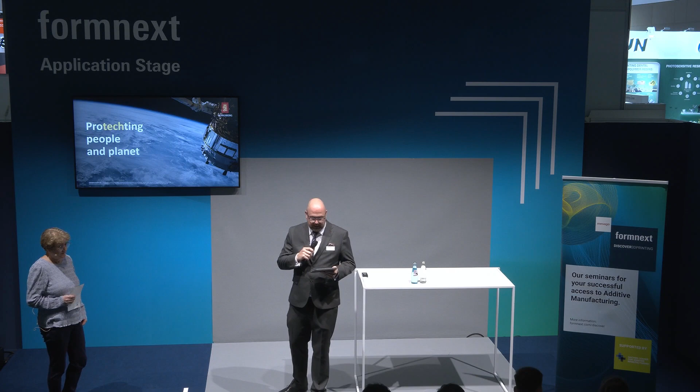Thank you. Hello, can you hear me? Yes.

I work in Kongsberg Maritime, a company that supplies technology, equipment and services for offshore and maritime customers.

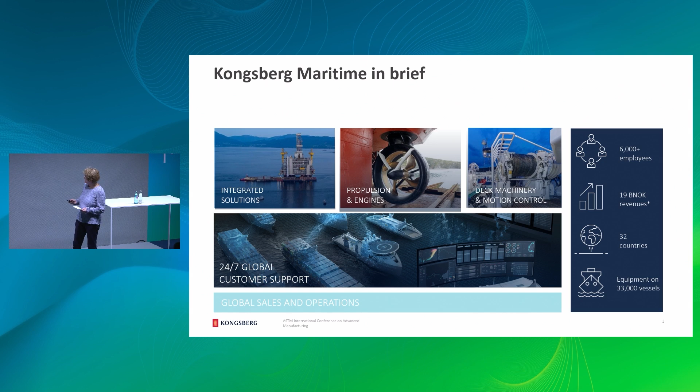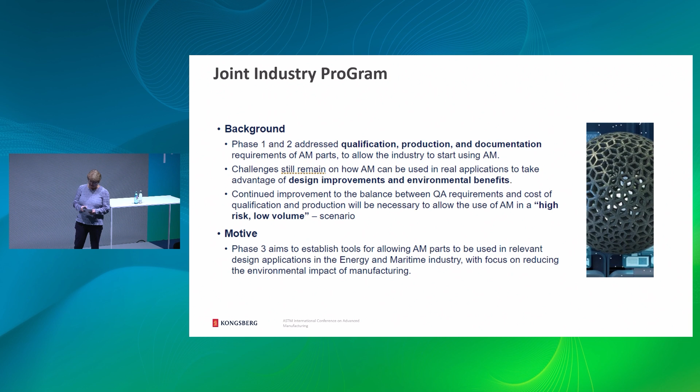We have been part of a joint industry program together with many companies, and we made guidelines for qualification, production and documentation of AM parts. In the next phase, phase 3, we are now focusing on design, sustainability calculation, and product families.

In the first JIP project, we cooperated with SLM and Voestalpine to make propeller blades for a rim drive tunnel thruster. We wanted to print this part to reduce weight, improve maneuvering response because of the reduced weight, and reduce manufacturing, machining and delivery time for this part.

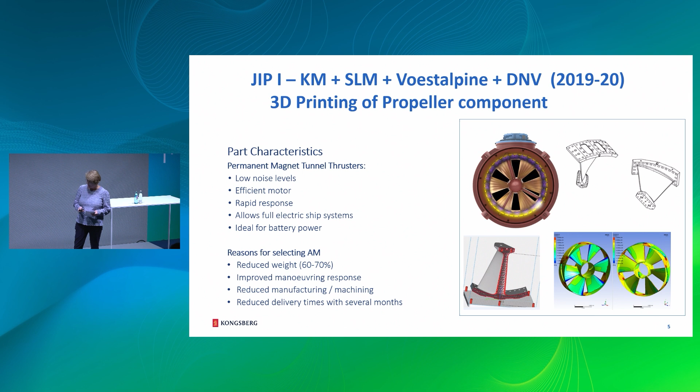Since we were part of this joint industry project, we wanted to produce this according to the new guidelines from DNV. In addition to printing the propeller blade, we made 2. We also printed a lot of test specimens so that we could test the part according to AMC3, the most critical test regime in the DNV guidelines.

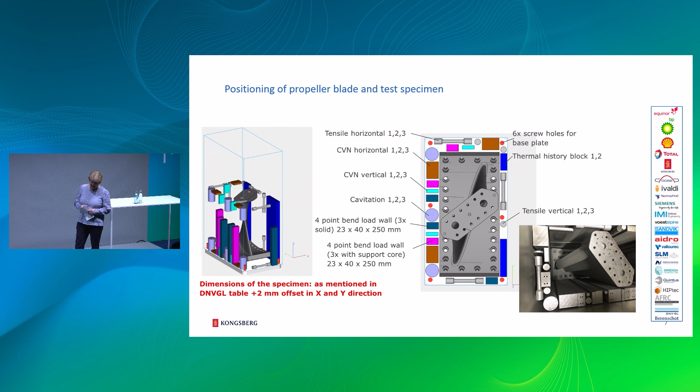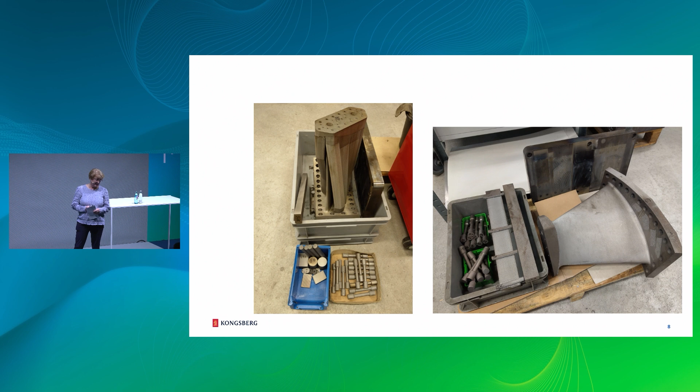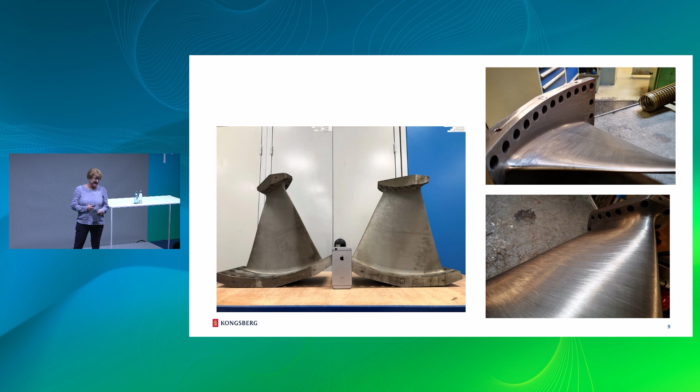The strength was according to our requirements. Elongation was perfect, fatigue properties were okay. There were no critical defects, and the geometry was within tolerances.

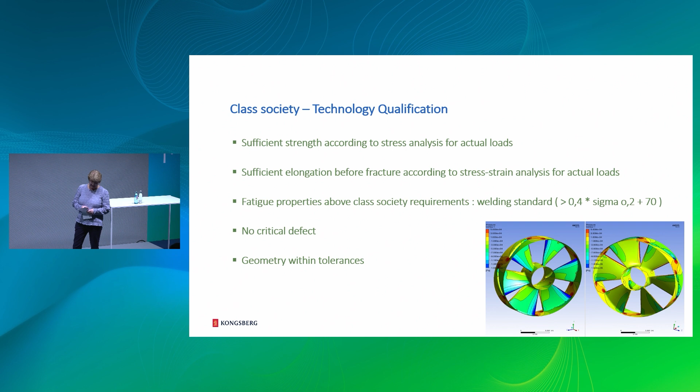The next step is that we will put it into seawater together with 4 bronze blades and 2 titanium blades, and we will see the difference between bronze and titanium. I didn't mention that these blades are hollow, so we did a lot of topology optimization. We had 3 mm on the surface, and inside it's a grid structure.

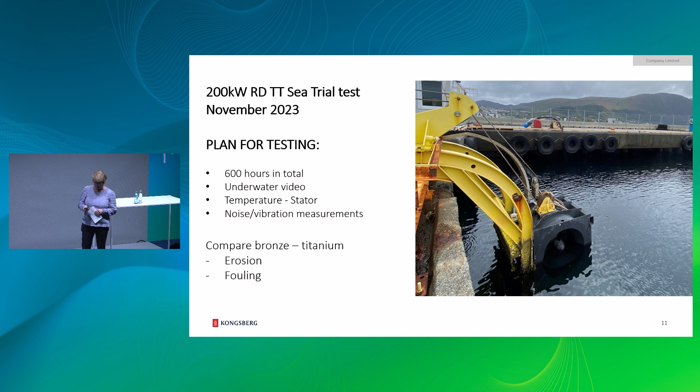In JIP 2, there were 4 components to be printed. Kongsberg Maritime's part was this crank disc, which is used to pitch the propeller blade for both propellers and thrusters. It's a quite critical component exposed to fatigue.

Today we usually make this with die forging. It is quite expensive with very long lead times. This is a spare part, and we often need it very quickly, because otherwise the ship is affected - we need the spare parts very, very fast.

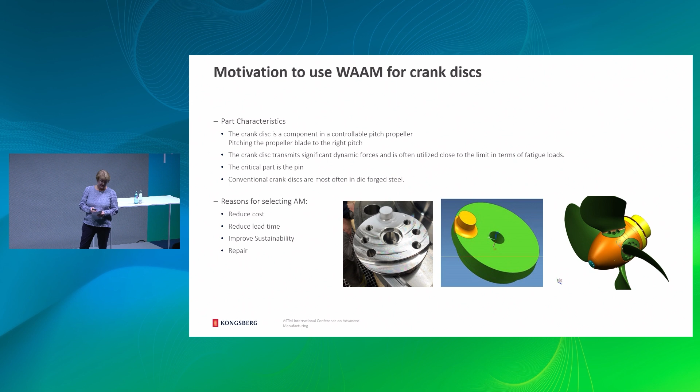So we worked together with Guaranteed. They wanted to print this wire arc additive manufacturing. We wanted to reduce cost, reduce lead time, improve the sustainability of the part, and also make it possible to repair. Here you see the partners in this part of the project.

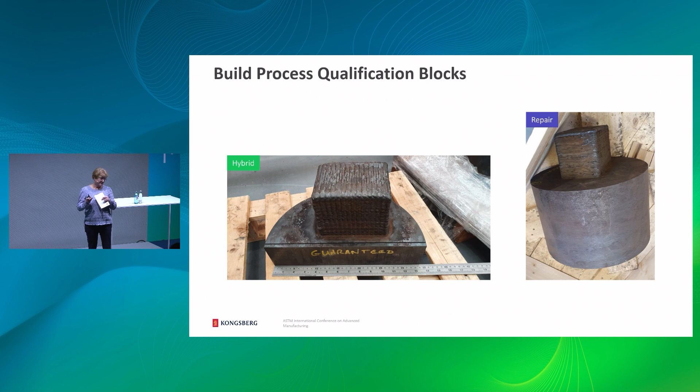We made this qualification block according to the guidelines. In addition to making a new crank disc, we also wanted to try to repair an old crank disc with wear. We tested both methods, and it seems to work very well to weld on both a new plate.

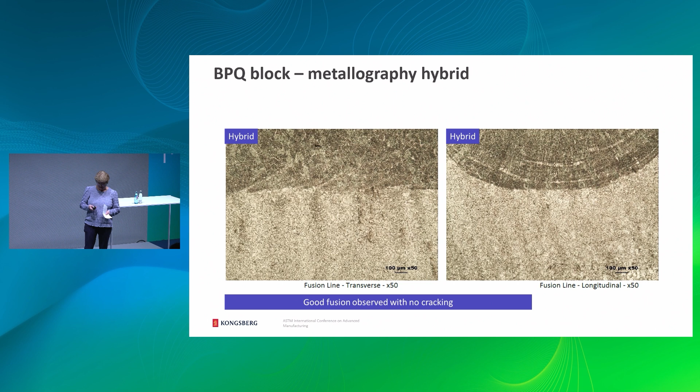I didn't mention that we chose to make the plate from a normal grade steel, since it's not highly loaded, and the pin is welded on with high strength steel. The transition zone looked very well - there were very good results on the welding, for both the repaired part and the new one.

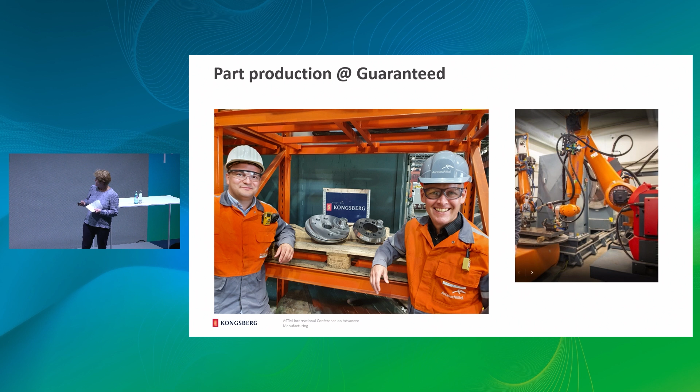Guaranteed is here today, and they're quite happy with the results. They made a new one and repaired an old one, then sent it to Norway where we did a final test. We also completed first article inspection, so we now have an approved part that we can buy from our supplier.

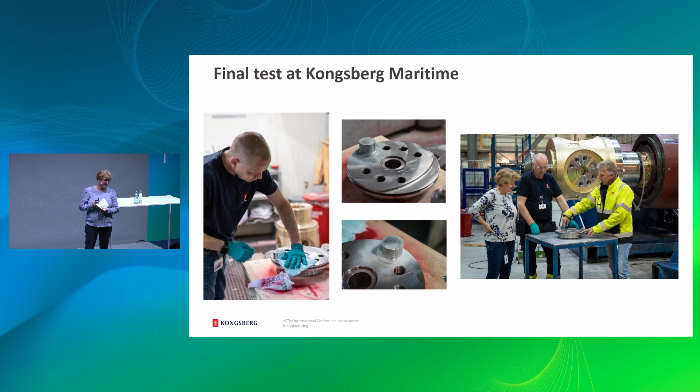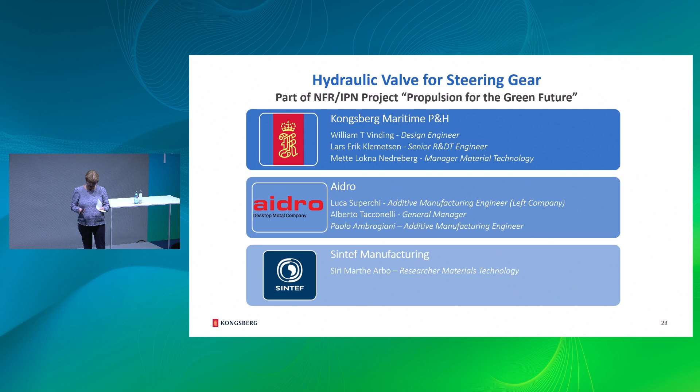This is not part of the JIP project, but we used the guidelines to make a hydraulic valve for a steering gear, done together with Aidro in Italy. SINTEF also supported us with material investigation. We wanted to make a valve for the steering gear, which sits on top of the rudder.

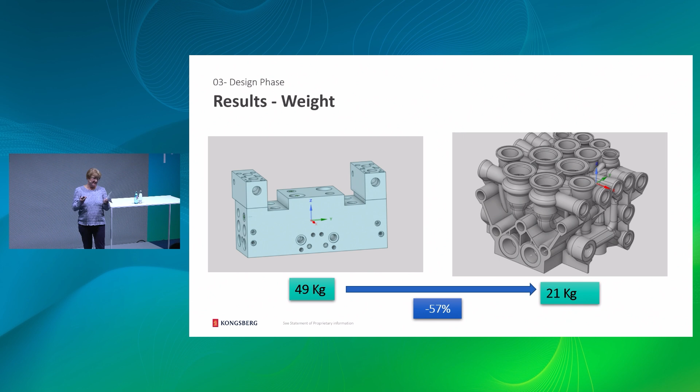Here you see how it looked earlier, with blocks and drilling holes, and here are the results of the topology optimization. We decided not to use support structures, so we added some material to avoid them. Here are the results - it's quite nice. SINTEF supported us with testing, so we know the part can be approved by class society.

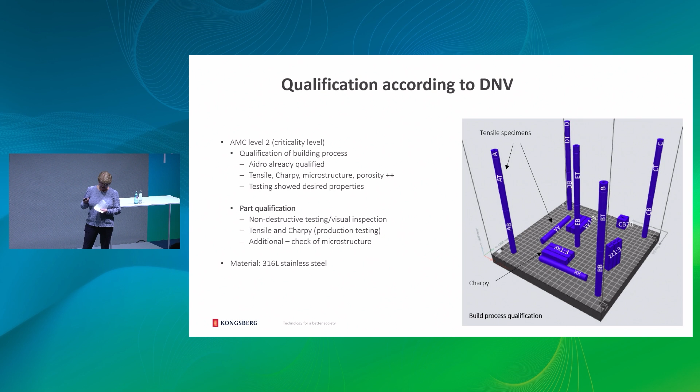They did testing according to AMC2 in the DNV guidelines, and the results were very good, meeting both our requirements and class approval requirements. We also looked into the microstructure, which was really nice, both in the thin sections and the thicker sections.

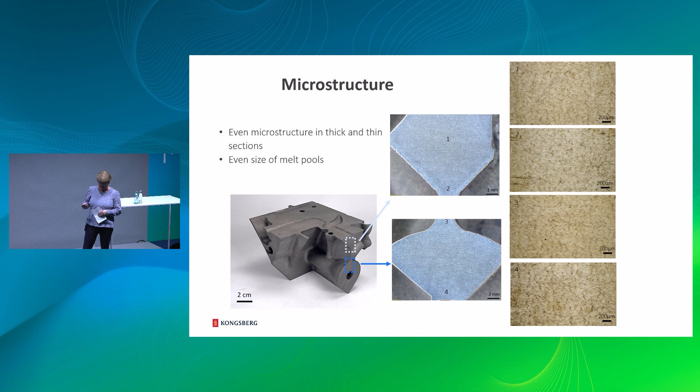The last component I want to share is a big flange for one of our thrusters. Equinor is our customer, and they needed a new assembly flange on the thruster. Since it was a very old part, an old thruster, we didn't have any pattern for casting.

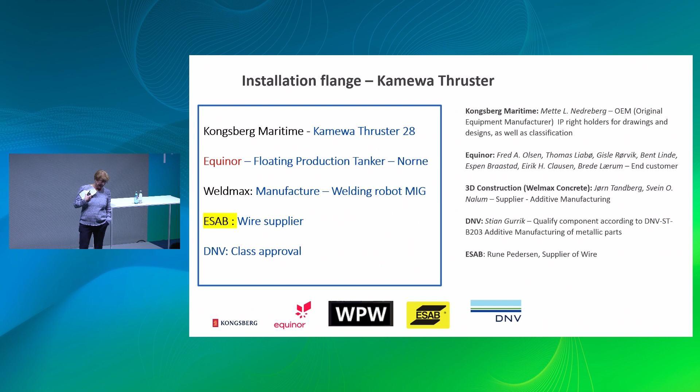The delivery time for new patterns would be half a year, so we discussed trying to print this part instead. It's quite a big part. This printer had previously made concrete parts for houses - they just changed to a MIG welder and printed this part. They started with a plate and printed structural steel, plus a stainless steel ring on top for bearing. It took about 10 weeks, and it's completely classified by DNV.

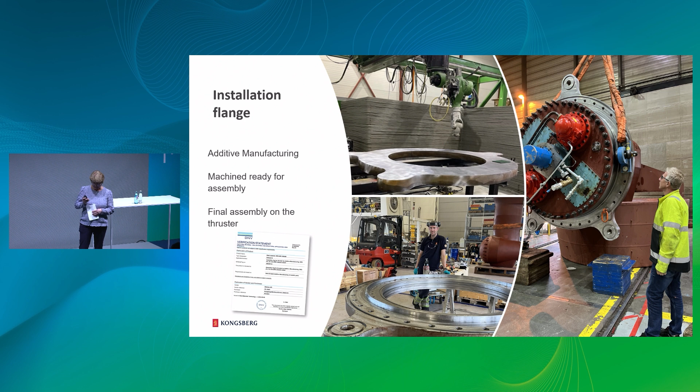So we have, in fact, a certificate. Compared to half a year, we made this within 10 weeks. That was it - any questions?

Engineering standards in AM, about collaborative efforts, and highlighting some innovative industrial applications - showcasing practical outcomes such as 600 mil diameter, 100 kilogram plus impellers for offshore pumps and water jets. So over to you two, thank you.

I will present our company first, and Mette will talk us through a couple of projects - two products we have been developing together in a qualified process. At the end, I will tell a little bit about an impeller which we produced together with Eureka for the customer Equinor, in a qualified process, in the DNV qualified process.

Nordic Additive Manufacturing is located in Norway, at Raufoss Industrial Park. We have very close ties to SINTEF, a research institute, and also the local university. As you see in the ownership, we have both SINTEF and Nammo, which is in the defense industry, along with some small industrial investors.

Our technology is laser metal deposition, and we are only concentrating on LMD so far. With LMD we can repair, build new parts, make changes, and improve existing parts. We say that we do additive production in a revolutionary way, giving us the possibility of a multitude of combinations of materials. You see some examples at the bottom of materials which we have tested.

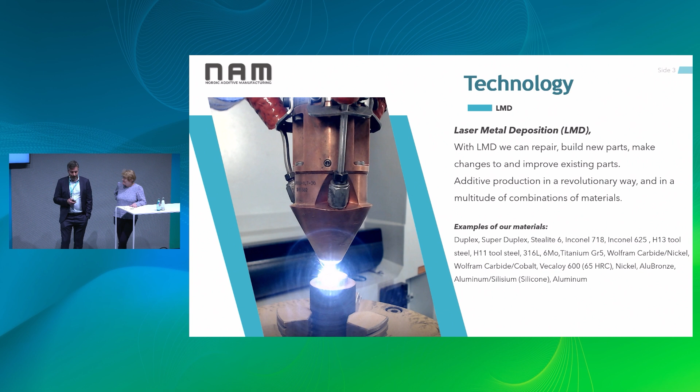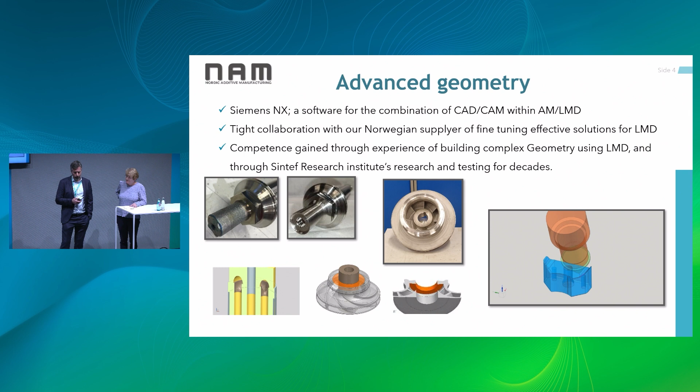We are using Siemens NX for both CAD and CAM, which gives us the possibility to produce advanced geometry. We have had a tight collaboration with the Norwegian supplier of the software to be able to do this.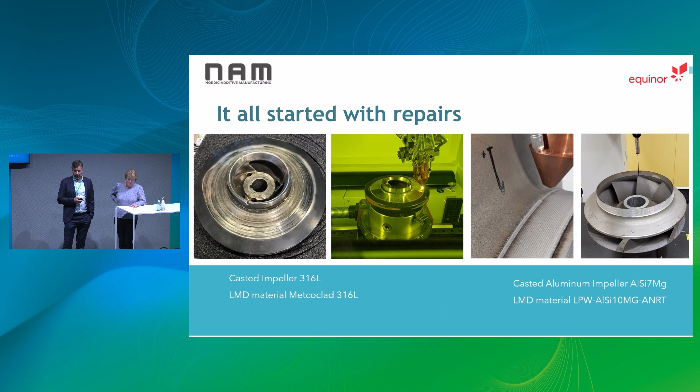But it all started with repairs - for us it started with repairs. You see some impellers here for Equinor, both in 316 steel and also in aluminium. And some examples with shafts for pump shafts, where we have been doing repair - this is in duplex material, 22 chrome. Also repairs like this in alu bronze for this old steam boat going on a local lake - this is in aluminium bronze. And now Mette will talk us through a couple of projects.

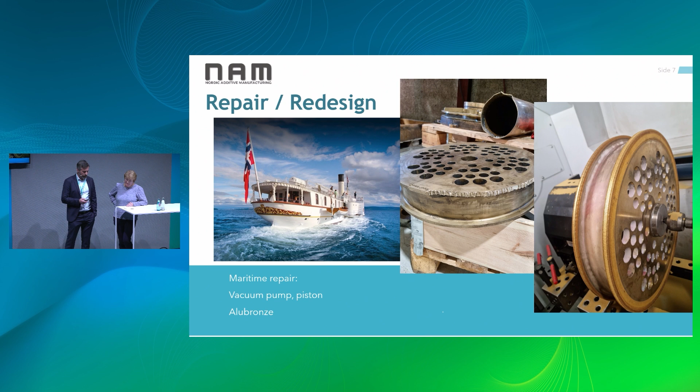Yes, so together with NAM, we had made two quite good components, I think, and we have also here tried to follow the guidelines from DNV.

So we have in fact had an EU project, we call it Fleximan, and we chose to make a water jet impeller in duplex material with this LMD method. And the scope was to improve lead time, improve quality, and reduce cost.

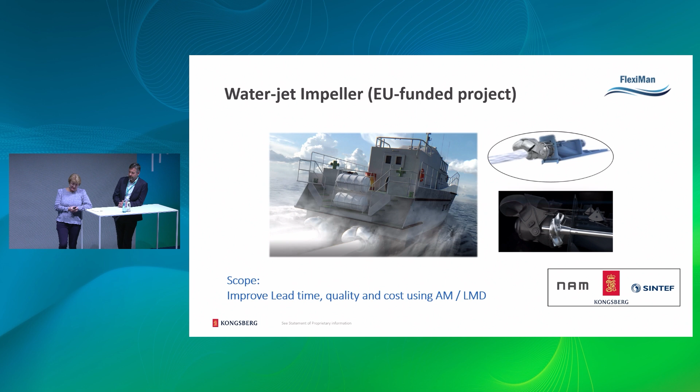So there are some standard requirements for this material. But in addition, we also had some Kongsberg Maritime requirements regarding microstructure, porosity, also fatigue is important for a water jet impeller, cavitation erosion, and also lead time and cost.

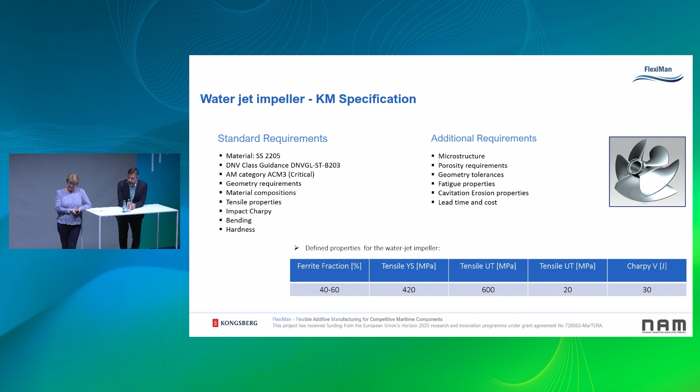So this impeller was produced by NAM and also heat treated. So we followed the guidelines from DNV.

This is a critical part, so we had to use this ACM3 rules. And we had to make this block, and in addition we had to make a representative part as we have in the critical part of the impeller blades. And we did a lot of testing, and the results were very good.

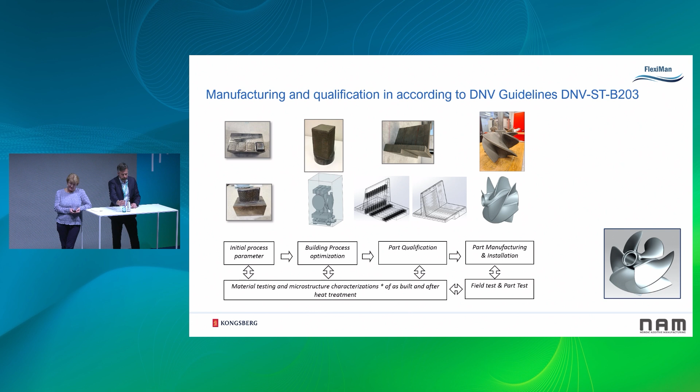So all properties were better than the requirements for this part in all directions.

One very good news about this was the cavitation erosion testing. Because this impeller is very high loaded, it's a very high speed propeller, so we have some problems with erosion in this casted duplex material.

When we compared casted duplex with bronze and also this printed material, it seems like the LMD material has better erosion properties than the casted, and that is a very good thing for our impellers. And also fatigue testing, we have this fatigue limit, our stresses is below, so it's also on high cycles and the actual loads, the properties are as good as casted.

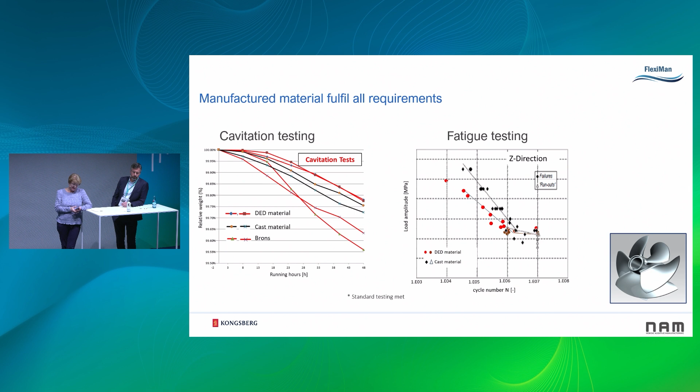So here you see the result of the printed impeller, the machined impeller, and also the geometry of this impeller was very good. What they say in the production in Finland is that they should maybe give some tighter tolerances, because they were skeptic to the low tolerances they could give, but they know that next time they will... Yeah, we can decrease the machining allowance on the next water jet impeller.

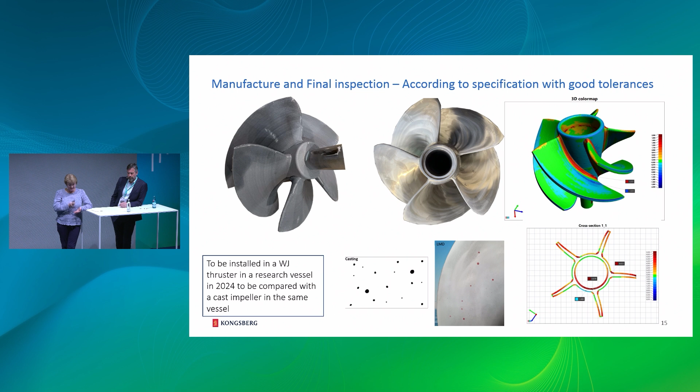And also porosity, there was some small porosity, but still within the requirements from the class society.

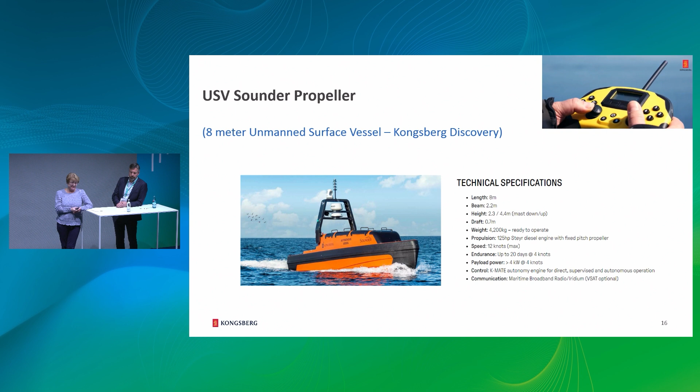The next part is we have this in Kongsberg Discovery, we have this unmanned surface vessel, which is doing a lot of research in the oceans. It's filled up with a lot of equipment, sensors, and so on.

So they have only bought a standard propulsion system for this vessel. And since it's autonomic, it has to last as long as possible. So even if they use diesel or electric energy, they want it to run for as long time as possible. So this propulsion system is not optimal.

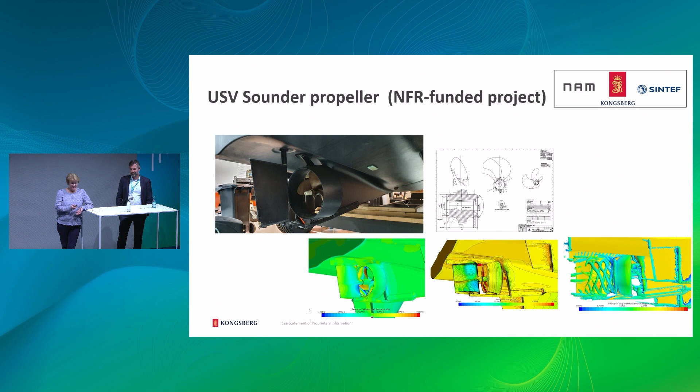So we did a design optimization of this propulsion system, did CFD analysis and strength calculations, and we made in fact this propulsion system now in glass fiber, but a 3D printed propeller with NAM.

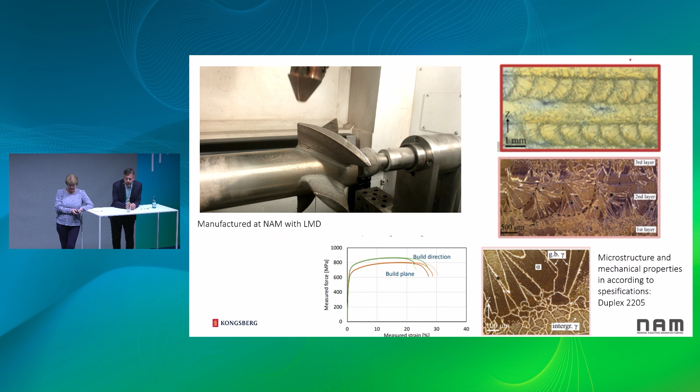Yeah, so here you see. So it went very well. The microstructure is quite nice, and the mechanical properties is in according to our requirements.

So here you see the result as printed, as machined. In the factory, they were quite happy with the result. They were showing around this nice propeller, and they did also penetrant testing, and there were no porosity.

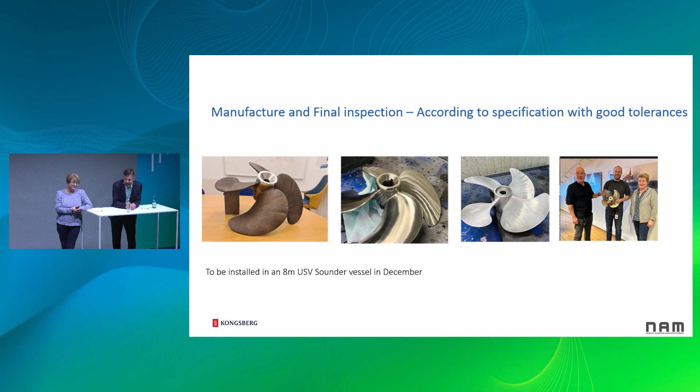So you see the happy team here.

We are ahead of schedule, Mette. Okay. It goes fast. Yes.

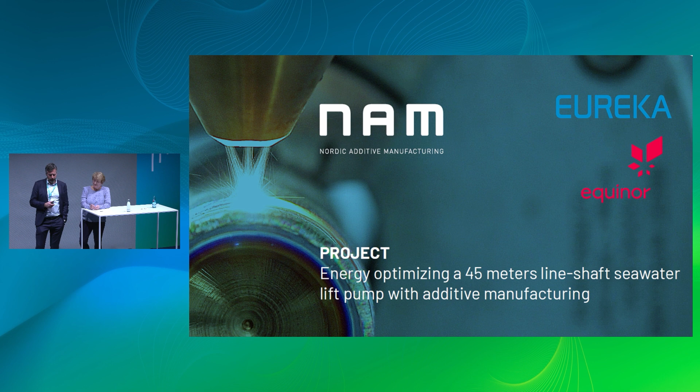The next project is a project we have been doing together with Eureka. Eureka is the OEM for these products, and Equinor is the customer. And it's all about energy optimizing of a big

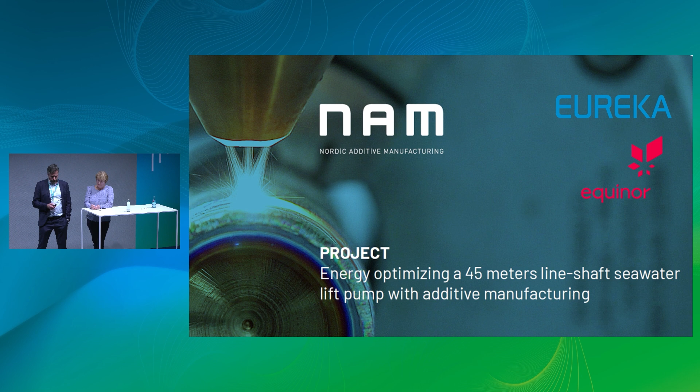seawater pump, lift pump, using additive manufacturing, laser metal deposition. The scope of work was like this.

In fact, this pump, it pumped 1,000 cubic meters too much every hour. It wasn't so important when you produced the power out on the field. But as you might know, it's going out with the electrical power out on the fields now, and it will be more and more important to do this kind of effectivization.

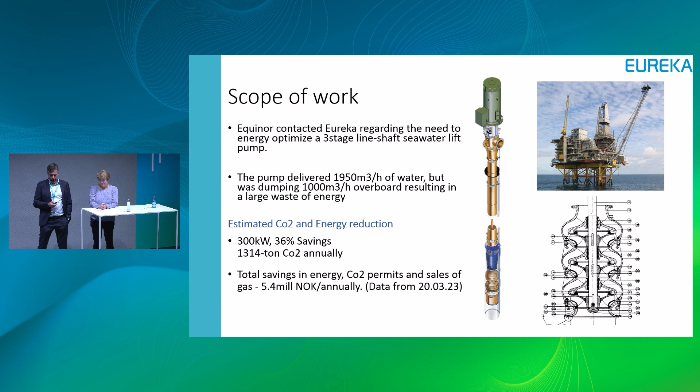There were some expected challenges in this project. The size of the impeller was 120 kilos per impeller. There were 3 impellers. It's a very complex material, the 22 chrome duplex, and it also was regarding NORSOK qualification.

NORSOK is a standard for the Norwegian shelf, what you call it. It's out on the Norwegian shelf.

And it was also a qualification according to this DNV GL, the new standard B203, AMC2.

And what's my thinking of a project like this is that it was very important with the collaboration of the involved parties. The collaboration with the OEM, Eureka, and our team in NAM, but also with SINTEF, the research institute, with the laboratory and the test facilities and so on, and also DNV. With DNV with this new standard, also developing the standard going through the project. And Equinor as an end user of the product.

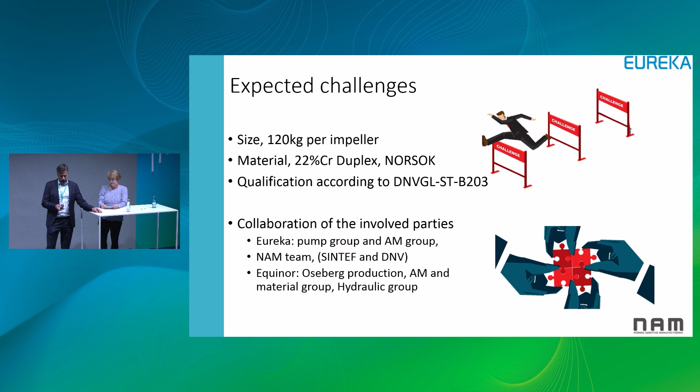It went well. We managed to do these impellers in a qualified process, according to the standard. But it wasn't without a fight and some struggle. We spent a lot more time than scheduled, and a lot more effort. But in February this year, or end of January, we delivered 3 DNV qualified impellers, each 100 kilos machined. It's never been done in a qualified LMD process before.

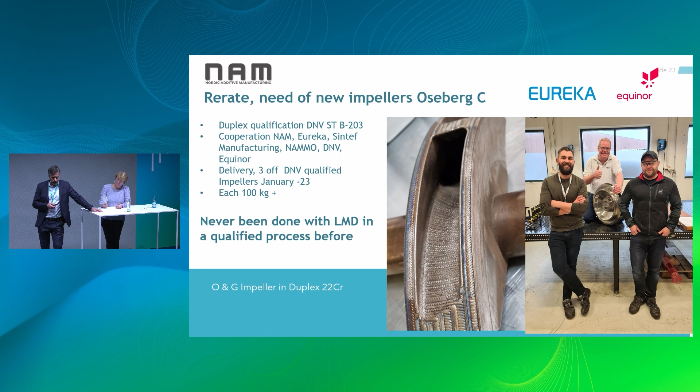This complex geometry is one thing, but the complex material is another. It's an austenitic ferritic material. It's very important to control the heat treatment, the building parameters, the speed, the power of the laser, and so on. We had different attempts in the building strategy, but we succeeded in the end.

Siemens NX was an important enabler for doing this complex geometry. And again, I mention this tight cooperation. Here is our machine, used for this product, a Trumpf TruLaser Cell 3000.

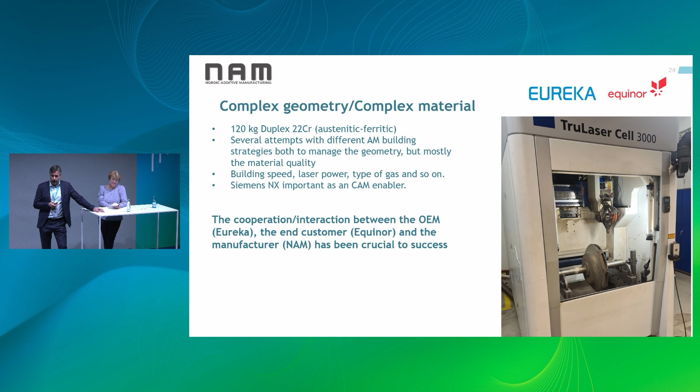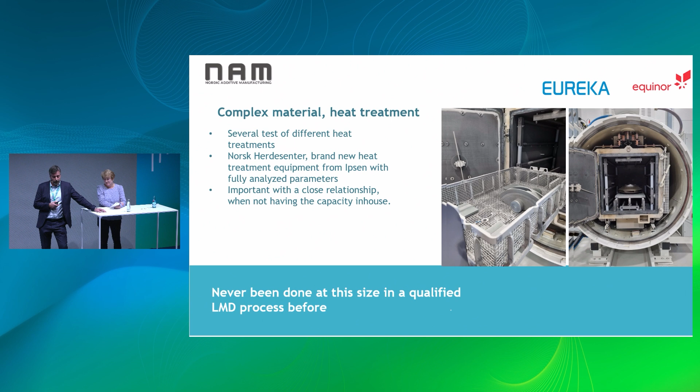This is from the heat treatment. We don't have our own heat treatment on this scale, so a company close by did the heat treatment. They have new equipment from Ipsen in Germany, very good equipment for this kind of heat treatment.

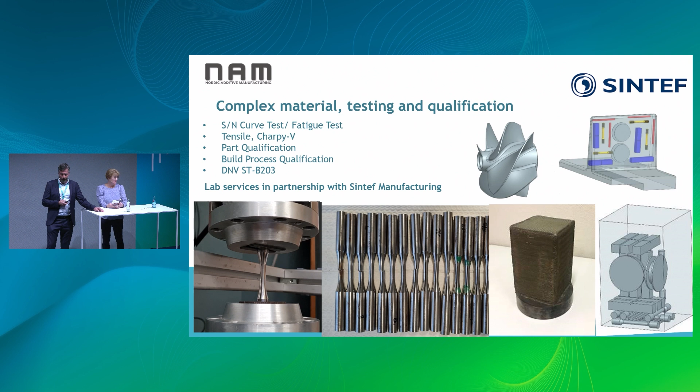As Mette showed us with the propellers, the test and verification for qualification was very important. With fatigue tests, tensile, Charpy-V - we had to test at minus 46 centigrade, and very strict, tight tolerances for the materials. During the project, we qualified the process and the part family. So now we are ready to make more products like this.

This is from the factory acceptance test together with Equinor and Eureka. Eureka has very good facilities for testing this kind of pump - I believe 60 meters depth at Sørumsand, so they can test these pumps in full scale. It was very interesting being there together with Equinor to look at the tests, and the tests were better than planned.

It was slightly lower vibrations, slightly lower power consumption than calculated. So the AM-built impellers were a success. Lucky for us.

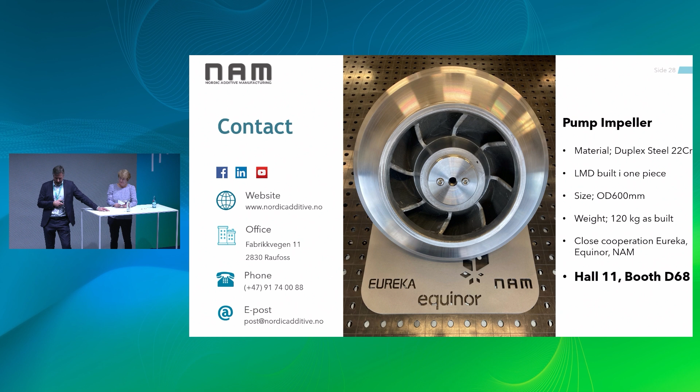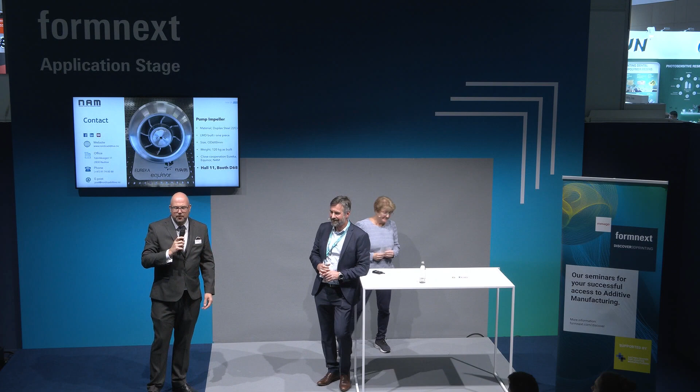Thank you very much, both. Any questions? Any questions to end the day? I know it's late - you've all been an excellent audience. Thank you very much.

Thank you very much for the presentation. For this part, I would like to ask, is there any internal CNC machining? No, not any internal CNC machining.

Earlier, I have made a lot of foundry patterns for a product like this, so the other technology they use is castings. We have been using some acid washing and just some mechanical grinding, but almost nothing inside. Eureka, the OEM, is over here, so no machining inside. Is it the same for casted parts? Yes, it will be. But they can coat the cores, and they can do something with the sand cores before they put them in the mold.

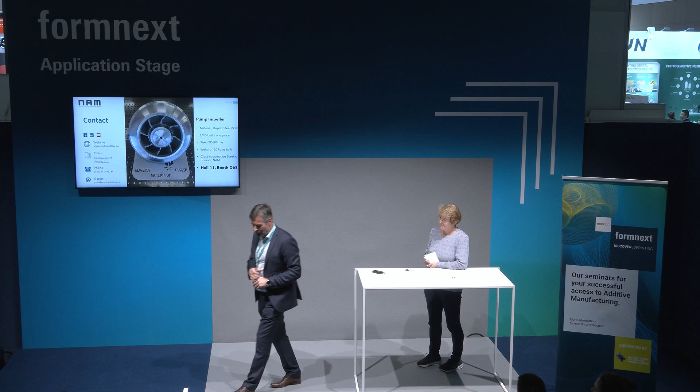Thank you. Okay, any further questions? No? Thank you both very much. Thank you. Thank you.